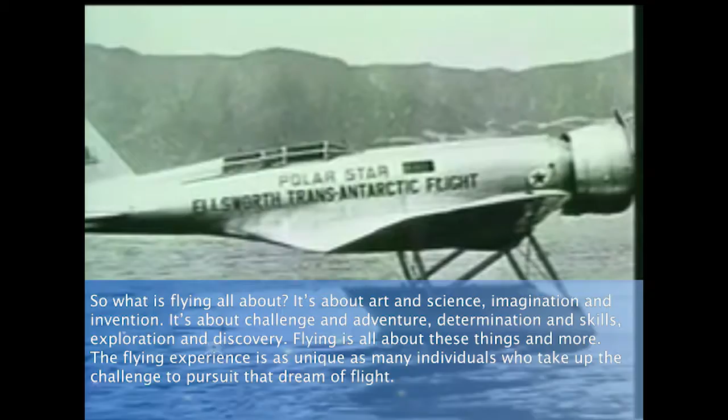So what is flying all about? It's about art and science, imagination and invention. It's about challenge and adventure, determination and skill, exploration and discovery. Flying is about all these things and more.

The flying experience is as unique as the many individuals who take up the challenge to pursue the dream of flight. You may be thinking about learning to fly for one or more of these reasons, or you may have an entirely different motivation. Whatever the reason, if you yearn to spread your wings and expand your horizons, this is your chance. You can learn to fly. Where do you begin?

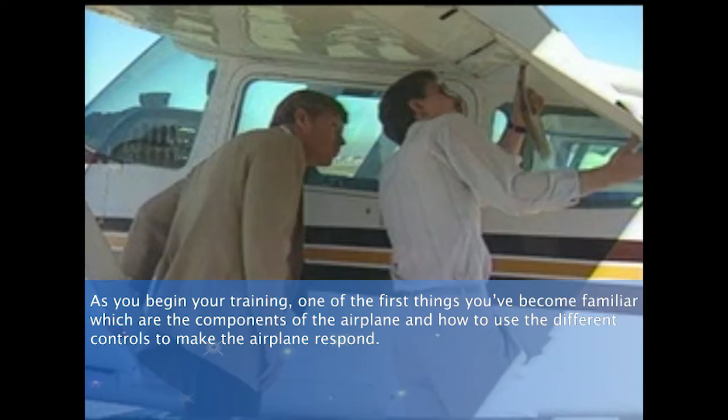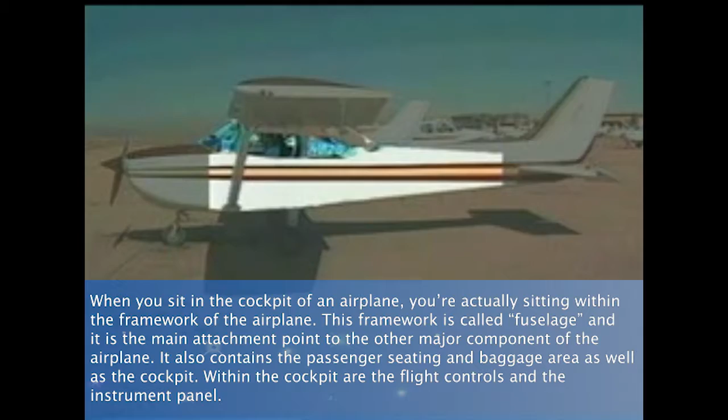As you begin your training, one of the first things you will become familiar with are the components of the airplane and how to use the different controls to make the airplane respond. When you sit in the cockpit of an airplane, you're actually sitting within the framework of the airplane. This framework is called the fuselage and is the attachment point for the other major components of the airplane. It also contains the passenger seating and baggage areas, as well as the cockpit.

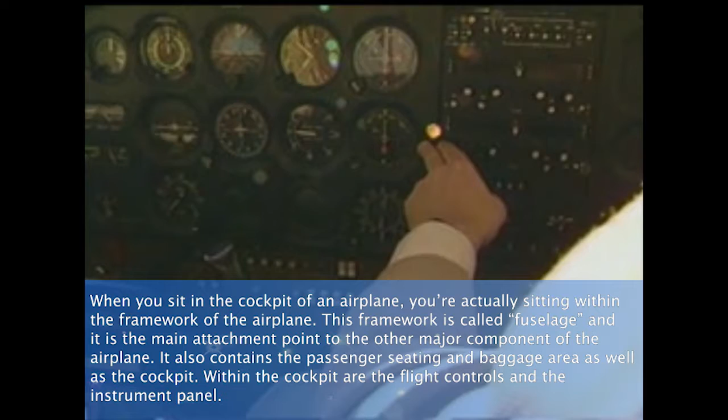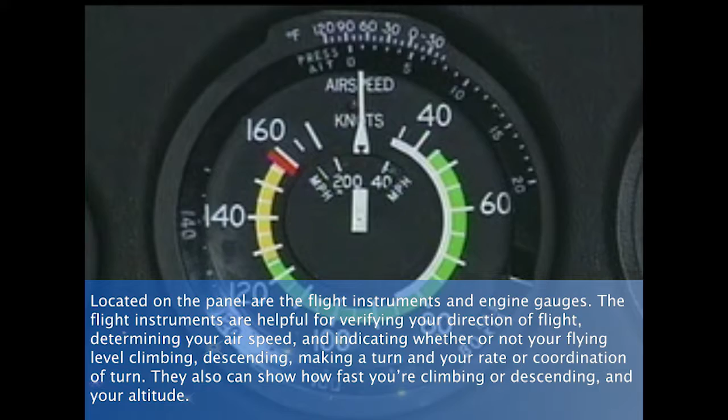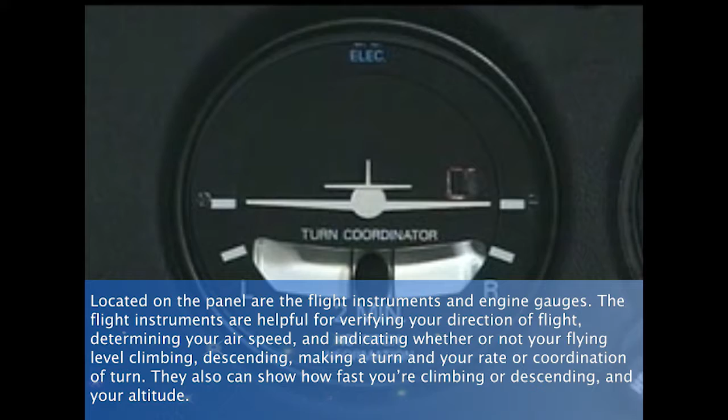Within the cockpit are the flight controls and the instrument panel. Located on the panel are the flight instruments and engine gauges. The flight instruments are helpful for verifying your direction of flight, determining your airspeed, and indicating whether or not you're flying level, climbing, descending, making a turn, and your rate and coordination of turn. They also can show how fast you are climbing or descending, and your altitude. The engine gauges are important for monitoring engine performance.

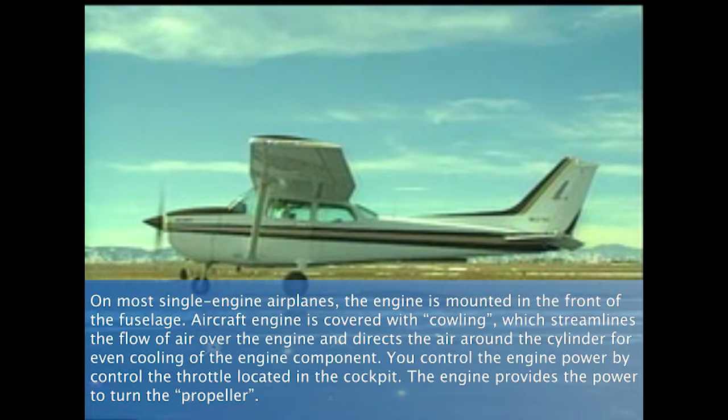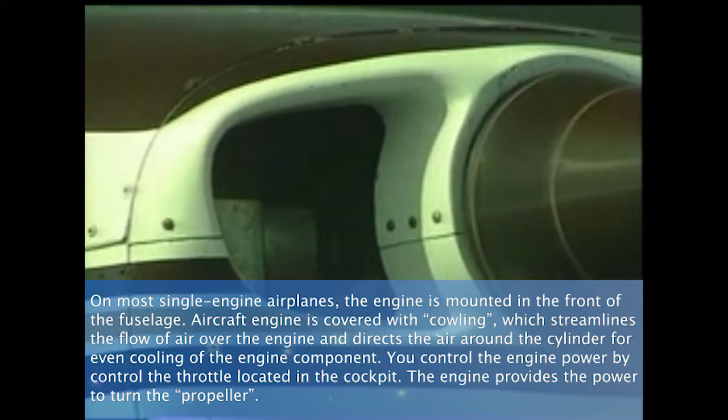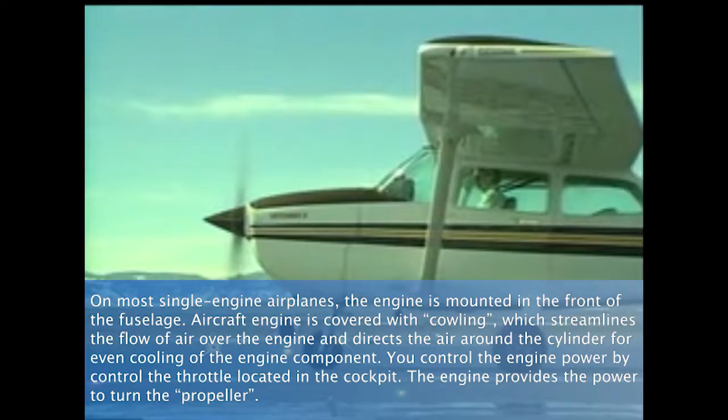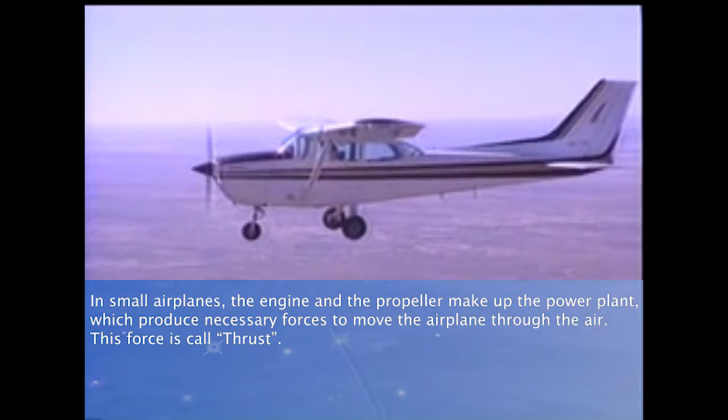On most single-engine airplanes, the engine is mounted in the front of the fuselage. Aircraft engines are covered with a cowling, which streamlines the flow of air over the engine and directs the air around the cylinders for even cooling of the engine components. You control engine power by using a throttle located in the cockpit. The engine provides power to turn the propeller. In small airplanes, the engine and the propeller make up the power plant, which produces the force necessary to move the airplane through the air. This force is called thrust.

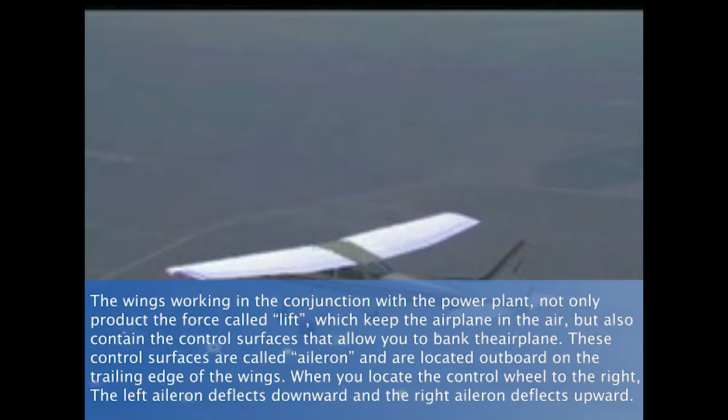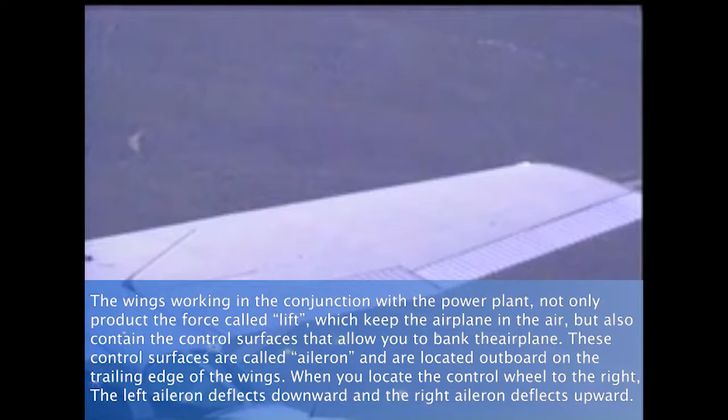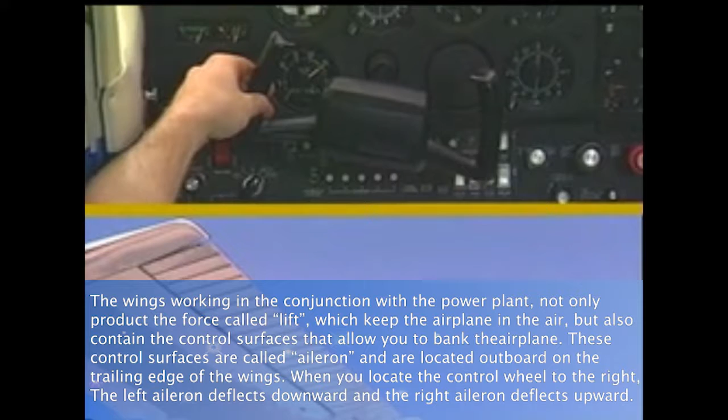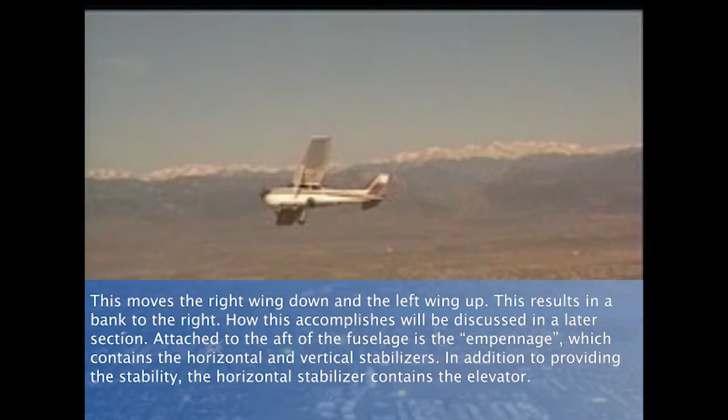The wings, working in conjunction with the power plant, not only produce the force called lift, which keeps the airplane in the air, but also contain the control surfaces which allow you to bank the airplane. These control surfaces are called ailerons and are located outboard on the trailing edge of the wings. When you rotate the control wheel to the right, the left aileron deflects downward, and the right aileron deflects upward. This moves the right wing down and the left wing up. The result is a bank to the right. How this is accomplished will be discussed in a later section.

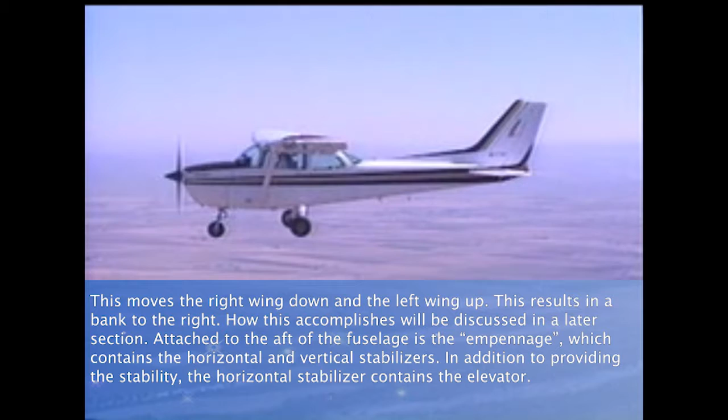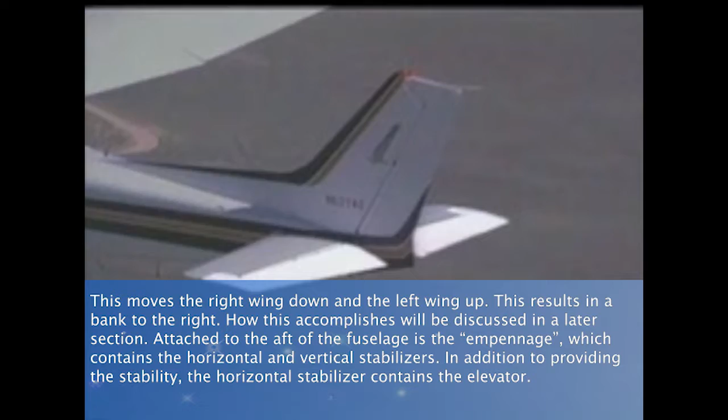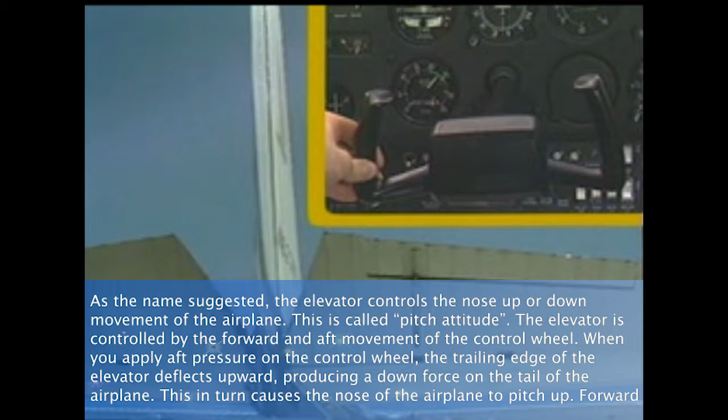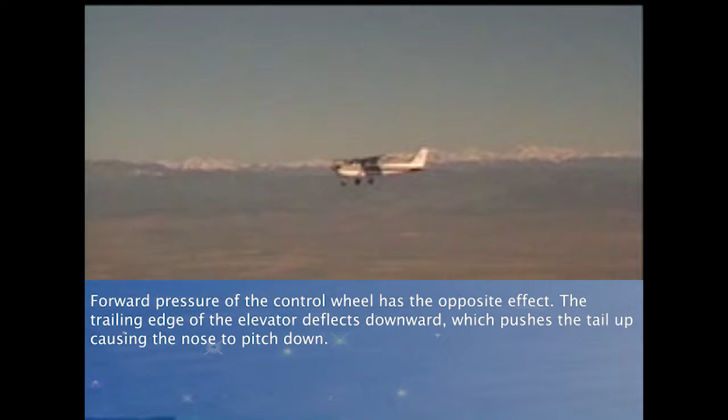Attached to the aft end of the fuselage is the empennage, which contains the horizontal and vertical stabilizers. In addition to providing stability, the horizontal stabilizer contains the elevator. As the name suggests, the elevator controls the nose-up or down movement of the airplane. This is called pitch attitude. The elevator is controlled by the forward and aft movement of the control wheel. When you apply aft pressure on the control wheel, the trailing edge of the elevator deflects upward, producing a down force on the tail of the airplane. This in turn causes the nose of the airplane to pitch up. Forward pressure on the control wheel has the opposite effect. The trailing edge of the elevator is deflected downward, which pushes the tail up, causing the nose to pitch down.

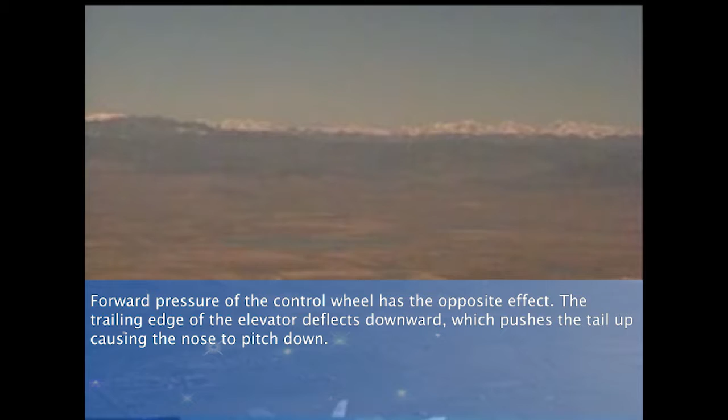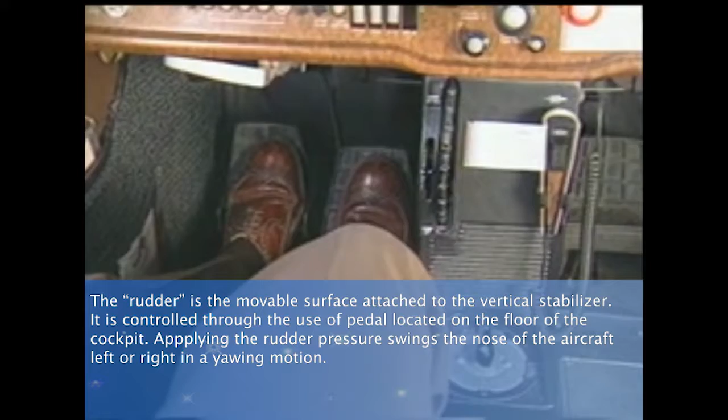The rudder is the movable surface attached to the vertical stabilizer. It is controlled through the use of pedals located on the floor of the cockpit. Applying rudder pressure swings the nose of the aircraft left or right in a yawing motion.

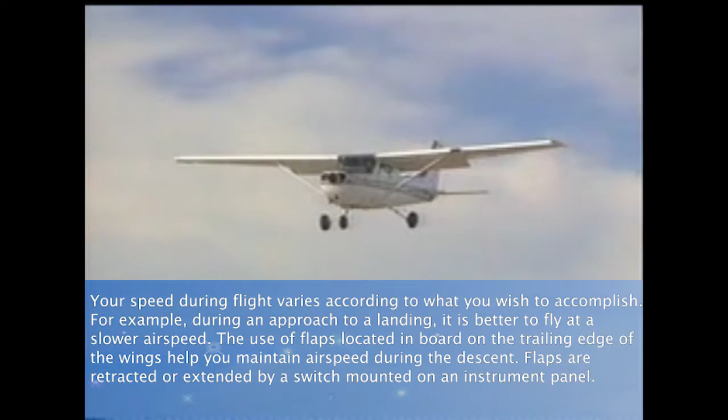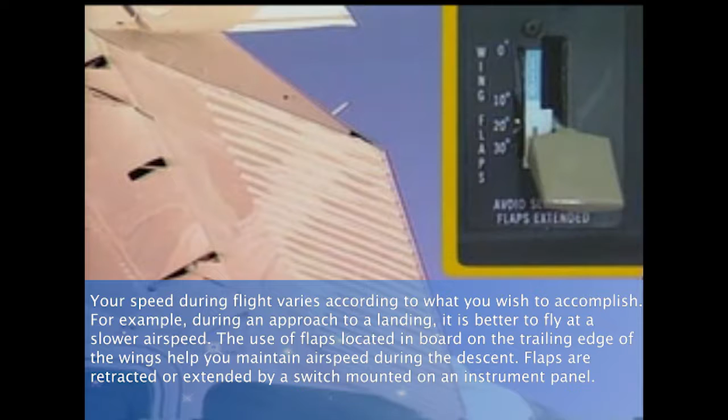Your speed during flight varies according to what you wish to accomplish. For example, during an approach to a landing, it is better to fly at a slower airspeed. The use of flaps located inboard on the trailing edge of the wings helps you maintain this airspeed during the descent. Flaps are retracted or extended by a switch mounted on the instrument panel. Since there are times when using all of the flaps would be too much, most general aviation airplanes have 3 or 4 flap settings. All airplanes are equipped with some form of landing gear.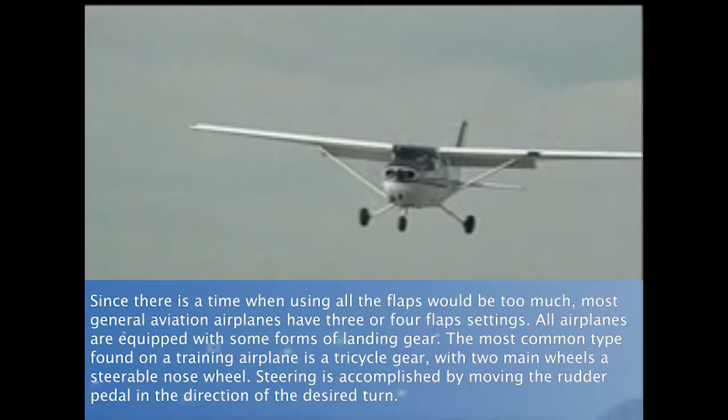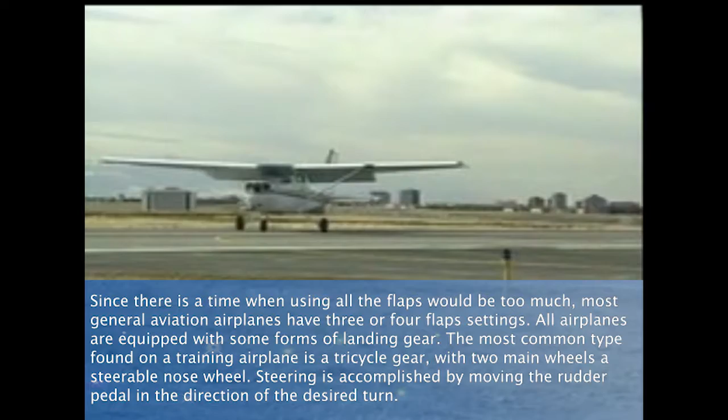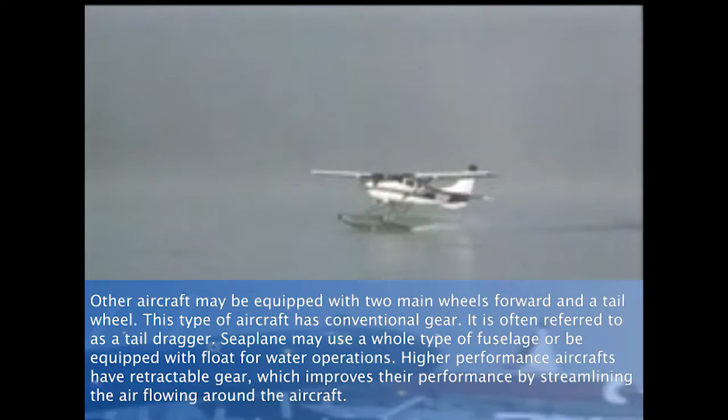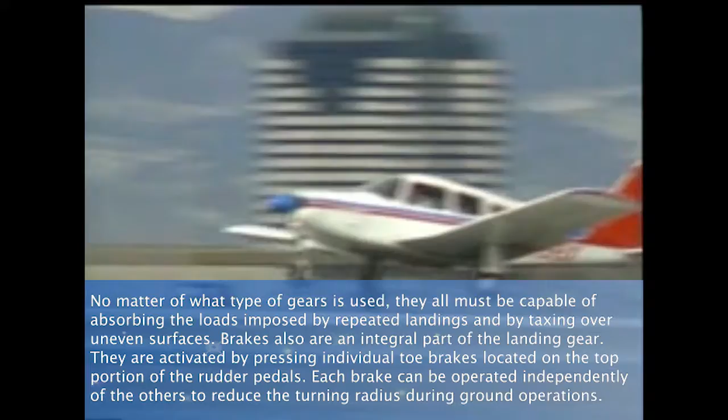The most common type found on training airplanes is the tricycle gear, with 2 main wheels and a steerable nose wheel. Steering is accomplished by moving the rudder pedals in the direction of the desired turn. Other aircraft may be equipped with 2 main wheels forward and a tail wheel. This type of aircraft has conventional gear. It is often referred to as a tail dragger. Seaplanes may use a hull-type fuselage or be equipped with floats for water operations. Higher performance aircraft have retractable gear, which improves their performance by streamlining the air flowing around the aircraft. No matter what type of gear is used, they all must be capable of absorbing the loads imposed by repeated landings and by taxiing over uneven surfaces.

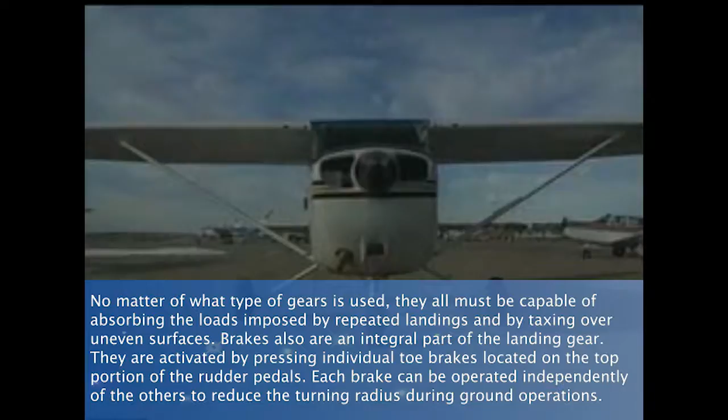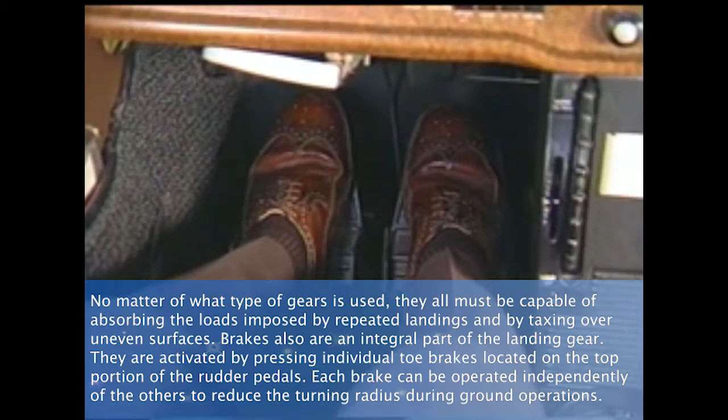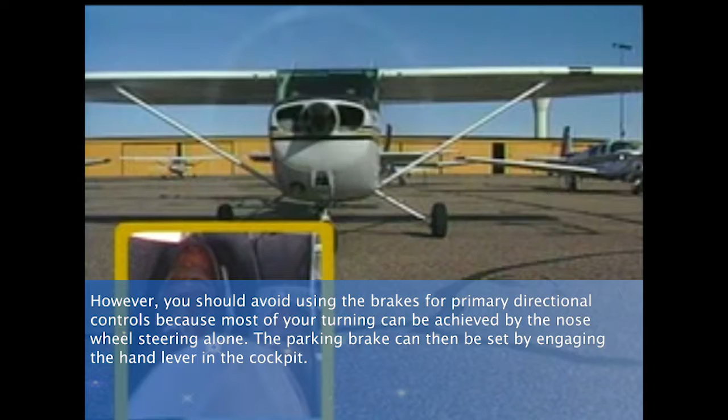Brakes are also an integral part of the landing gear. They are activated by pressing individual toe brakes located on the top portion of the rudder pedals. Each brake can be operated independently of the other to reduce the turning radius during ground operations. However, you should avoid using the brakes for primary directional control because most of your turning can be achieved with the nose wheel steering alone. The parking brake can then be set by engaging the hand lever in the cockpit.

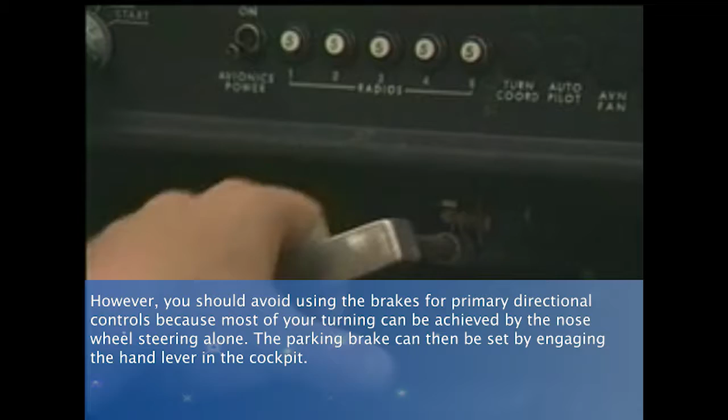What you have just viewed in this section is a brief overview of the airplane and some of its components. Your textbook goes into greater detail on these subjects and covers additional items which were not covered in the video.